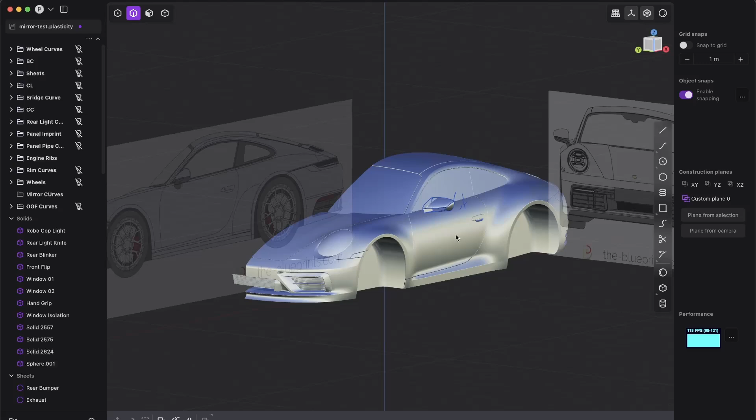Hey everyone, super quick tutorial: when to use Loft, Patch and xNURBS, and I have the perfect example, I think, for you.

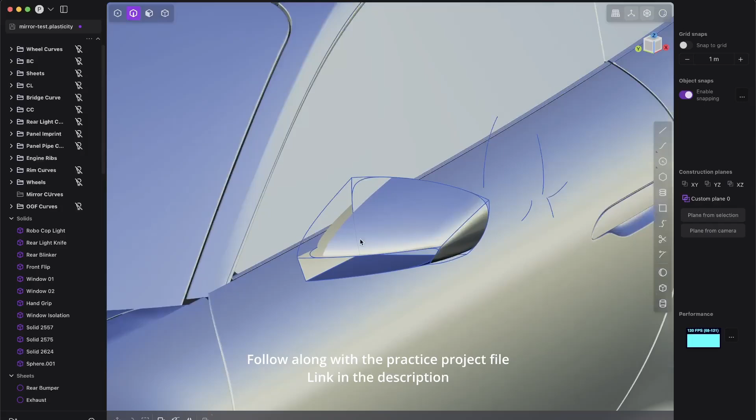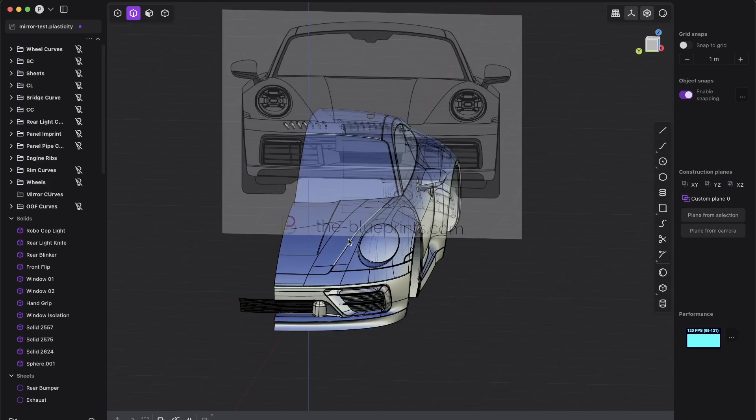So I've prepared everything, created some curves, created some surfaces, trimmed everything. As you see, if I hide the curves and go into zebra, we have pretty nice reflections everywhere. But here I can show you something really cool. First of all, let's hide the whole car body because this will get too confusing. I've already prepared everything here.

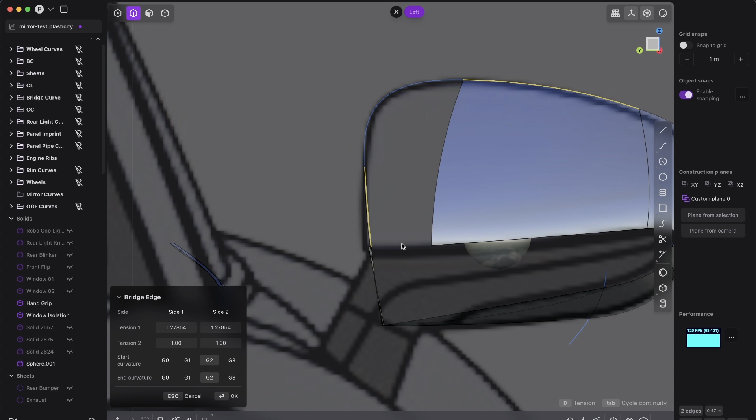Now what I want to do is create some curves. First, I want to connect those two curves. I will select them, use the bridge edge command and increase the tension a little bit. And you see we have G2, so this is definitely what we want. This looks great. As you saw from the top view, we have this circular shape here, so I've created some space and room.

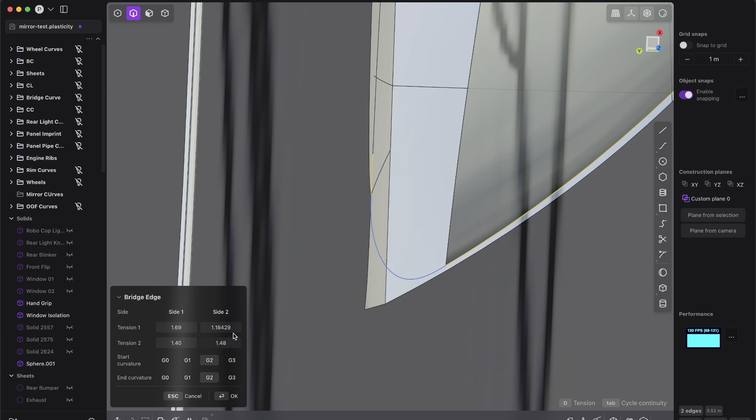So I will take those two edges and bridge them as well, and adjust the tension a little bit, so I have a nice circular shape here.

People always ask me when to use xNURBS, for an xNURBS tutorial and so on. The thing is, the more you learn, practice and model, the more you learn to go with the flow. You try one method first, and if it doesn't work, you try the second one. If the second gets a better result, you take it. If the first one was better, you go back to it. And if both methods don't work, in Plasticity and CAD modeling you always have a plethora, like 10 more methods to do something.

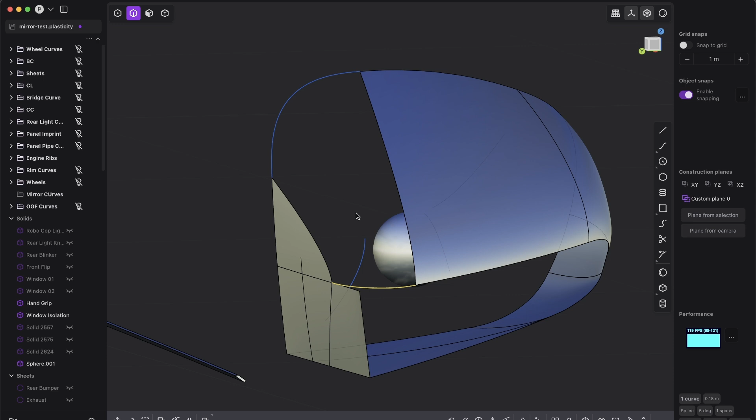What I do first, because it's also a cost, is just use the indie tools. I will first loft those with G2, because we want to use G2 on that mirror since it's such an organic shape. Shift click, we add this curve, and shift click, we add this curve. It might look fine, so we have to check with zebras.

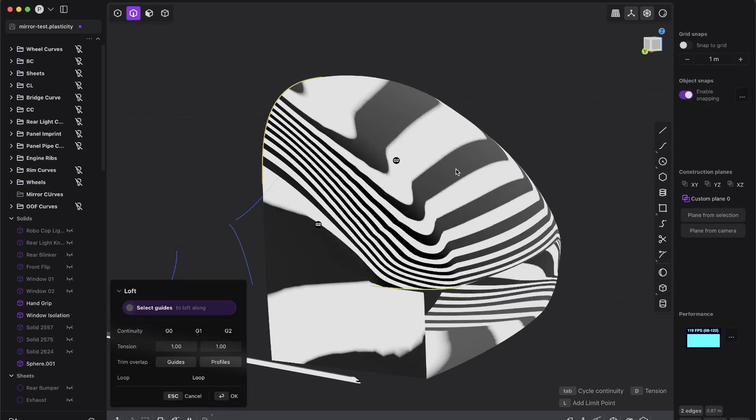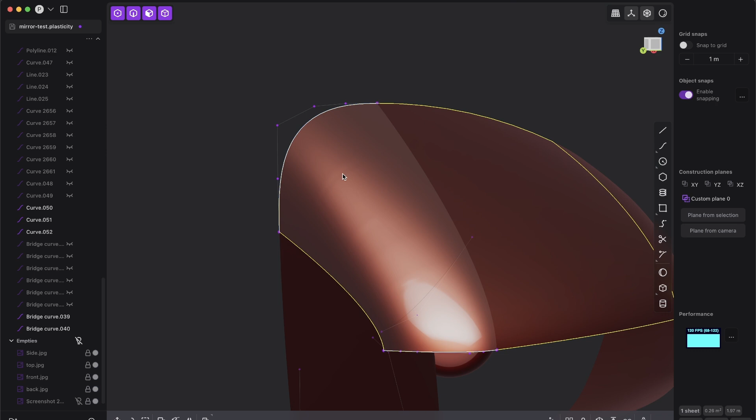If you are a beginner, this is absolutely fine. With the zebras we see a nice curvature, a nice G2 connection, but something is a little off with the surface. There are a few jagged lines. Let me hide the blueprints, we don't need them. If we join those surfaces it gets better, but there's a little imperfection. In this view, I don't know if you see it on YouTube, we have these wrinkles. So in this example, Loft doesn't really work.

Let me show you that with such complex shapes, the normal Patch is most of the time not what you want, because it usually doesn't work. The whole Porsche here is 95% created with Loft, almost no patch, because Loft gives a thousand times better result.

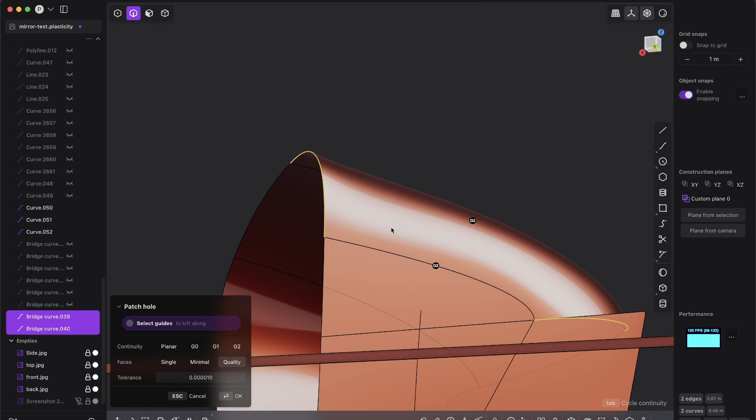But if we patch it, even though we can give it G2, the problem with patches is, maybe you think it looks good, but we have this really weird deformed shape here, because Patch just doesn't know what to do in such examples. So we always want to go with Loft.

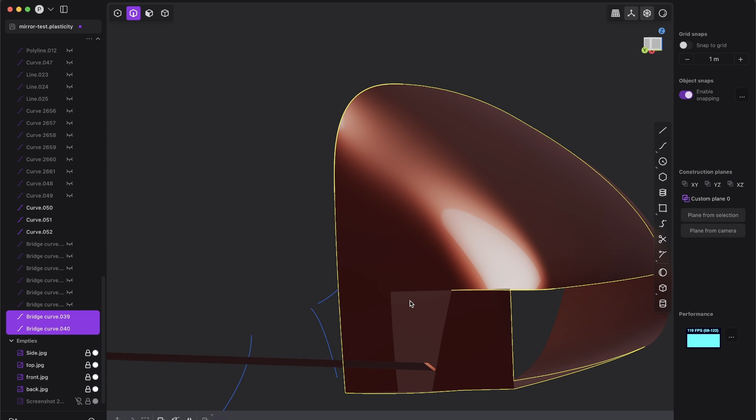But you saw Loft doesn't work out straight away, but I will still show you how to do it with Loft. But now xNURBS, and this is the beauty of xNURBS, because again, I first tried to do it with Loft, because Loft usually gives us amazing results. So especially if we have here 4 edges, we don't need xNURBS most of the time, right? We can most of the time do it with Lofts.

And I just like problem solving. I just like to use also the standard tools because of the courses and so everyone can follow along, right? But you also learn a million times more than if you just xNURBS everything from the start. But the thing is, now, for example, we tried Loft and it doesn't work exactly. Then patch definitely doesn't work.

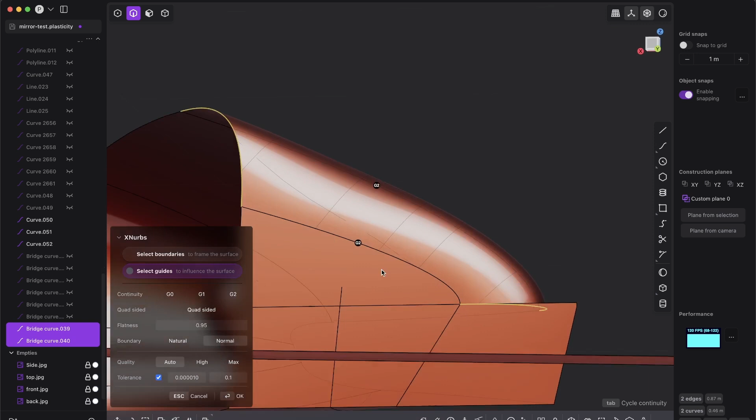So if you have xNURBS, then you just smash an xNURBS on that, tab, G2, G2, and very important, you see, we have again a very deformed thing here, but xNURBS is much smarter than patch because you have 4 edges. So you have to click here quad-sided and look what will happen with the surface. Bam. Because it's quad-sided, you also see it here with the lines, it follows the shape and knows exactly what we want it to do.

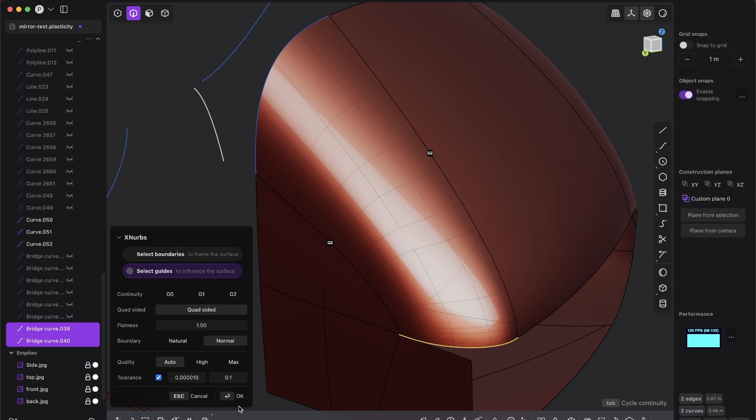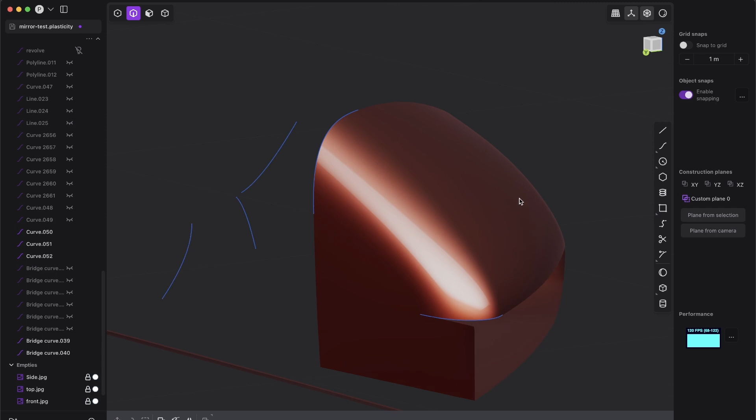Press OK, and now you see we have a very, very beautiful connection. Look, we have a very nice continuous G2 line, right? So we don't have any sharp things going on here. And also in this view, it just looks very good. So xNURBS worked fine, but also because we set up everything pretty correctly.

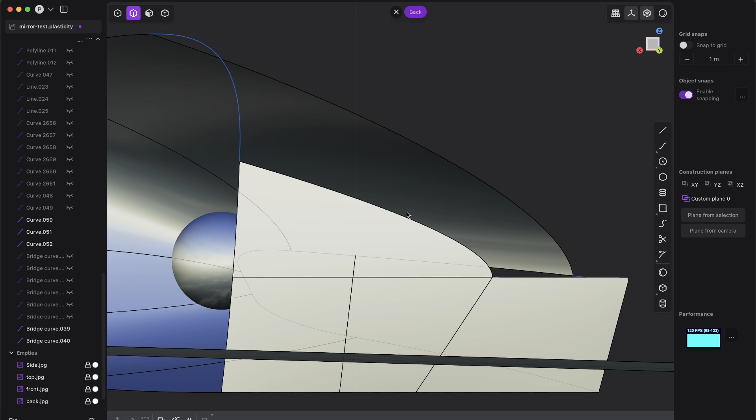But now let me show you how to fix that without xNURBS. If we go a few steps back, you remember we got some weird stuff going on. What I also just did is you have to try. That's what people misunderstand all the time; they ask me for some God-given solutions, but there are none, and I also don't know them. It's literally just trying out and seeing what might work, what might not work, where the problem could be, how can I solve it with my current skill set.

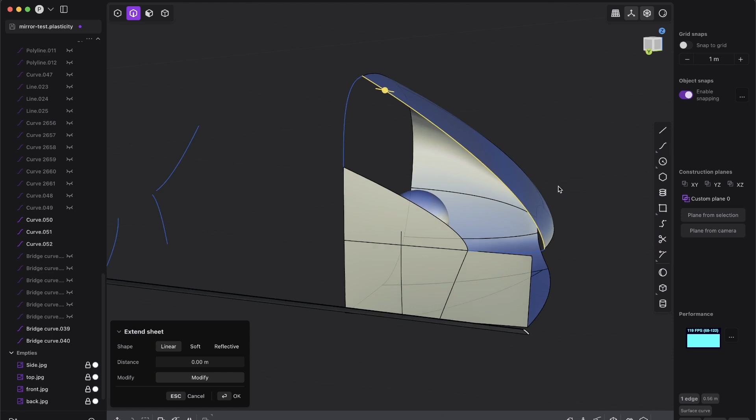That's why you just have to learn, practice, work, do, and you start to understand how things work. So for me, it's pretty clear. This line is very, very long and straight, and we don't have any curvature going on, right? But if you check this one, you see that here we have a bit of strong curvature. So here we have a nice long edge without any bending. But here it starts to bend. And this might be a problem.

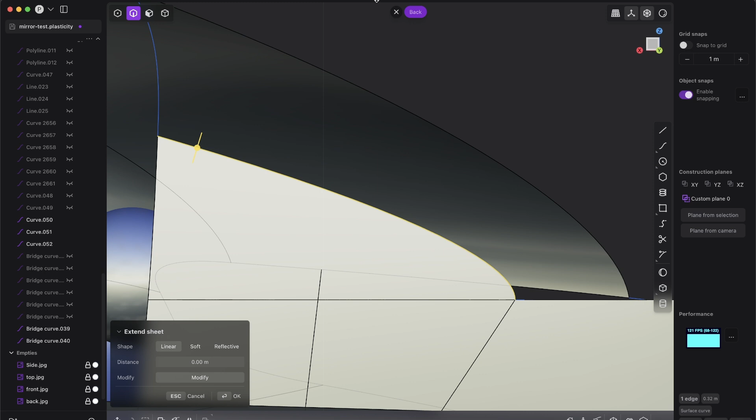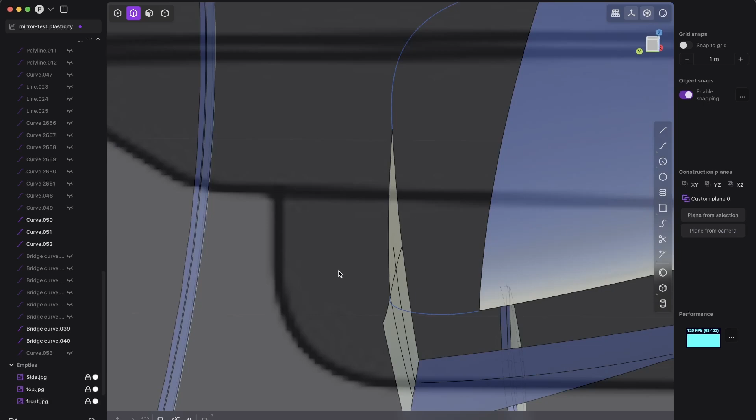So what I do then is go to the back view, create a control point curve, snap to this point here and create another line from corner to corner, which will be a little bit more straight, right? So something like that, and just cut a little piece away here, all that kind of stuff. Now let's see if this will work better. I will select those lines and loft them with G2 and shift. And let's check out zebra. And voila, guys.

Let's join that and see what we get. And voila, you see we get almost an xNURBS result. And the most important thing is here where we have the edge that we don't have any break. So just so you see the difference: if we give here just G1, that's the whole problem with G1. You see with G1, this piece and this piece are connected, but we have this very, very strong reflection break.

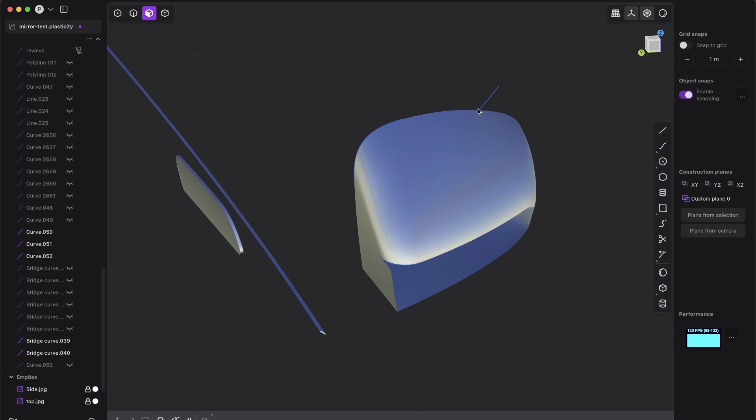Whereas with G2, if we give again G2, G2, G2, you see this line smoothly transitions into this curved surface here. And this is what gives us very nice results.